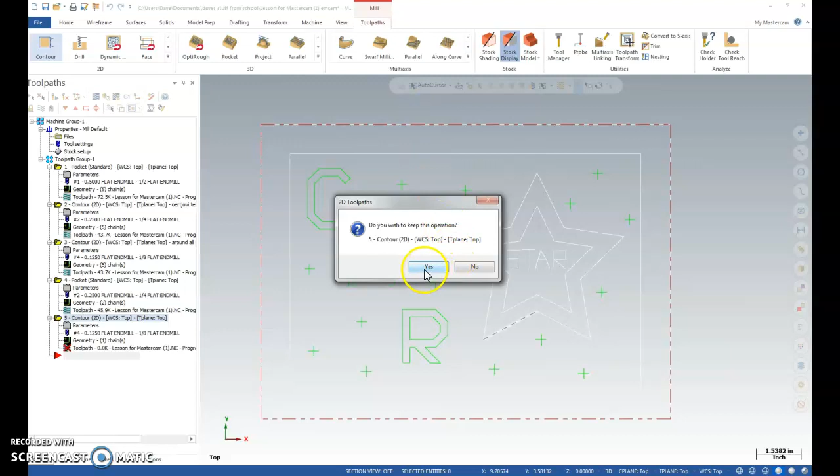Okay, it's just lagging, I guess. So I'm going to go back and close that. Let's keep this operation. Okay, try it one more time. I don't know what happened there, it's just kind of lagging. So I will try that again.

So again, I'm going to go to contour. I'm on chain, I'm going to select it. Apparently it's there. Good. And then I'm going to go to tool.

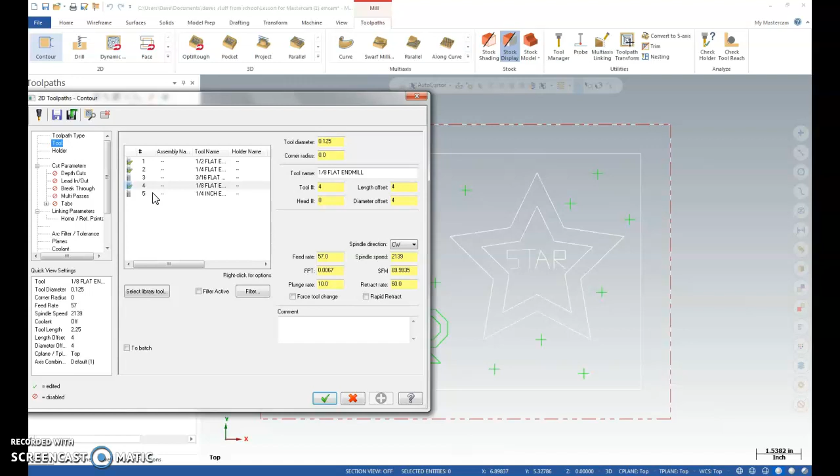Now I'm actually going to delete this to show you where I got it from, because it's here right now since I already loaded it. So I'm just going to get rid of it. I think I can just delete it.

Yep, okay. So I'm going to grab the right tool, which is the 1/4 inch tool. There it is. I'm going to change the speed to 59.

And then 10 and 60. I'm going to write a little note in here.

I'm going to go down here to cut parameters, and this is where I'm going to turn the compensation off, because we're actually trying to run the tool down the middle, which is kind of like engraving, but with a milling tool. And the depth, I'm going to check.

It should be down 0.125, so it's the same level as this pocket I just did. So select, and I am ready to go.

So that's good stuff. I'm going to fix this one because I know that I did not have the right speed for the tool. Haha, you thought I didn't catch that, but I did.

So of course that's the 1/4 inch tool, so I should have used 59 and 10 and 60, blah blah blah blah blah. Again, pretty good idea to have it, but I'm not wasting my time on it for a lesson. So checkbox, and I'm going to select all and regenerate the path, and then select all and verify.

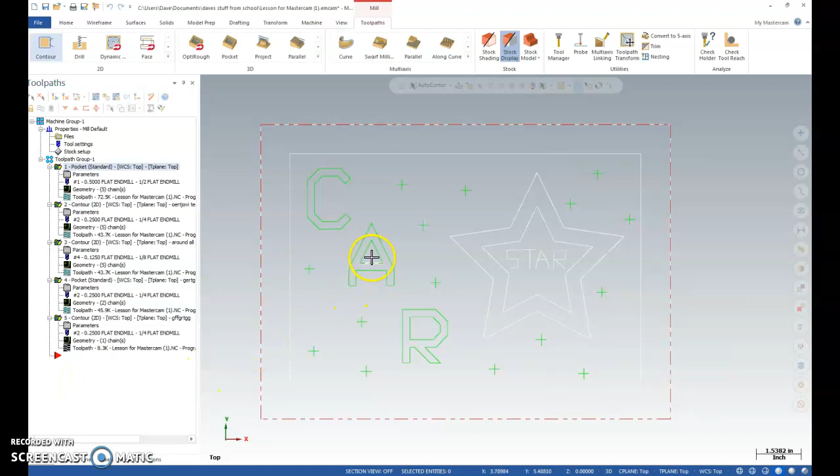So I'm just going to go to pocket, which is here. Make sure chain's on, and then touch this guy. Remember, I don't care about the direction of the arrows for a pocket. So I have these two pockets.

They're small, I'm going to use the 3/16 tool. So checkbox, and the tool is 3/16.

And remember, 3/16 is the smallest tool you're allowed to pocket with. And then you never use it to clean up, so you never contour with this tool, just pocket. And then we will clean up the inside of those two areas with the 1/8 inch tool.

So, all right, so here we have a feed rate. So again, this is 60, 59, 58. So 58. And again, I emphasize that these speeds are because later we want to be able to quickly change them to the correct speeds for wood. So they have to be different so that we can select them all and change them all at one time.

I believe everything's already set here anyway, so we've already used it a bunch of times. I'm just going to put in the depth. In this case, this is down 1/4 inch. All right, there I go, checkbox.

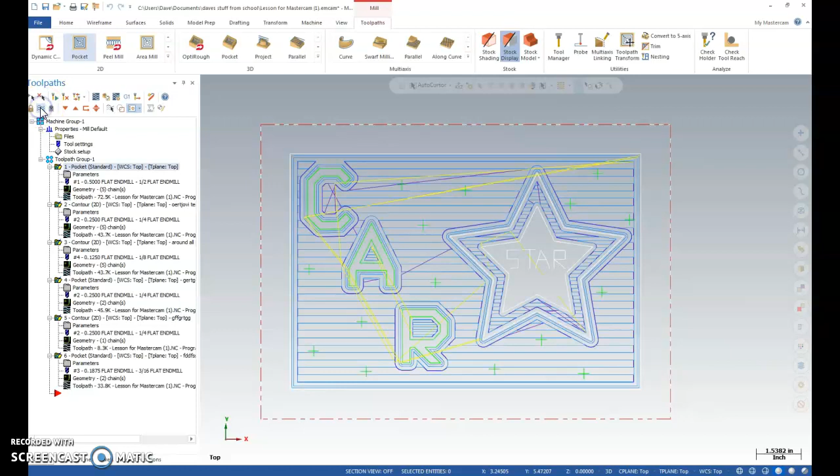All right, good. I've got the inside of the R, but you can see there are some little corners in here that are rounded. So I'm going to get rid of those, make them smaller, but I'm going to get rid of them by contouring with the 1/8 inch tool. I don't like these lines. Remember, we can get rid of those, right? This will put them all on, and this will turn them all off. Those are just the tool path lines, the center of the tool going all over the place.

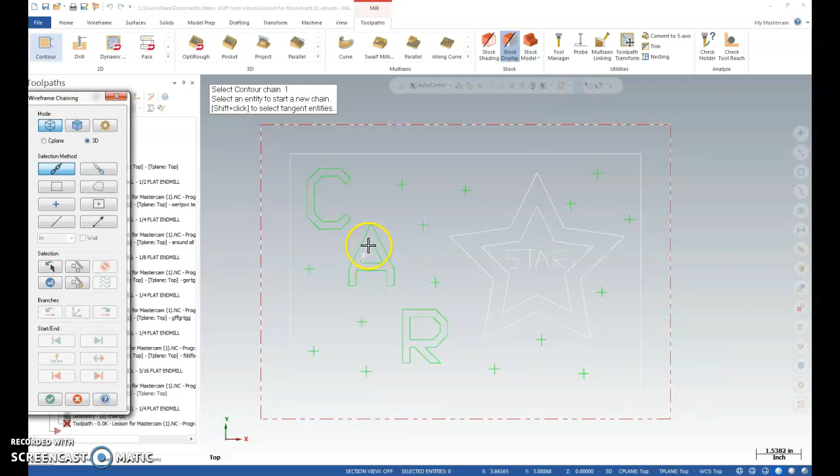So I'm going to do a new one, which is contouring, because I'm cleaning up the inside of the letters. On chain again, this time I have to think about it. I want to go on the inside of this A. So I'm going to do a contour, and make sure it's counterclockwise. I'm going to select, there's the center of the line, this end, counterclockwise, and again, center of the line, this end, counterclockwise. So I know the tool is going on the inside here, and it's going to be the 1/8 inch tool to clean it up.

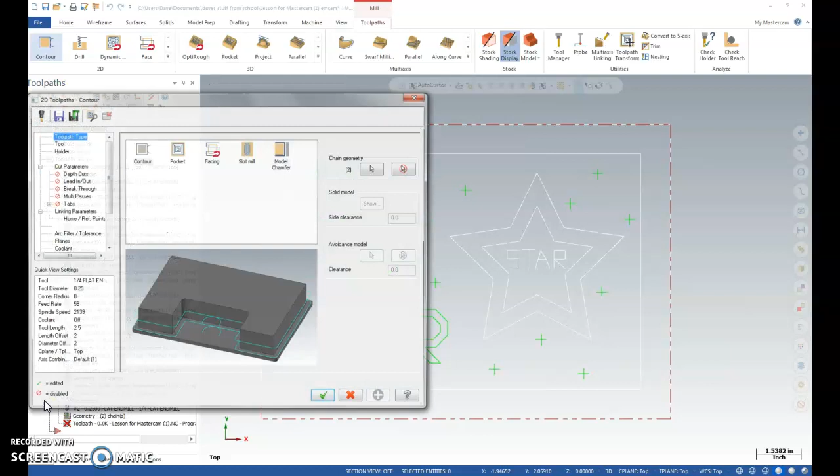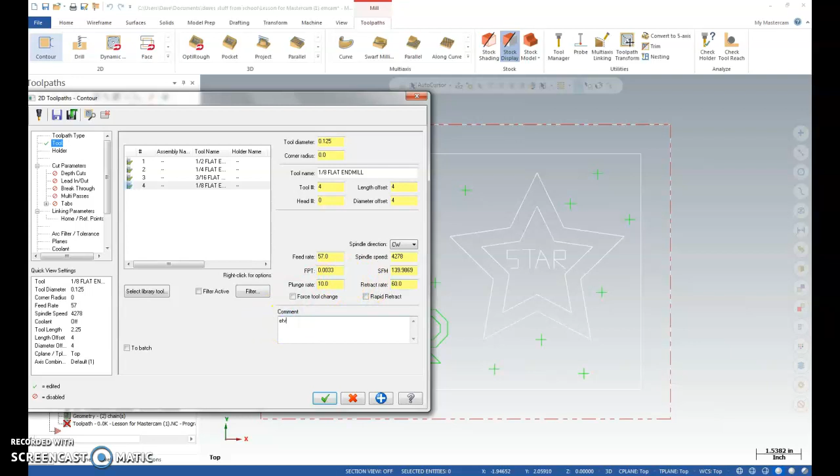Checkbox. Tool is 1/8 inch. Again, I'm going to remember 60, 59, 58, 57 is the speed. So 57, and then 10, and 60. And that looks pretty darn good.

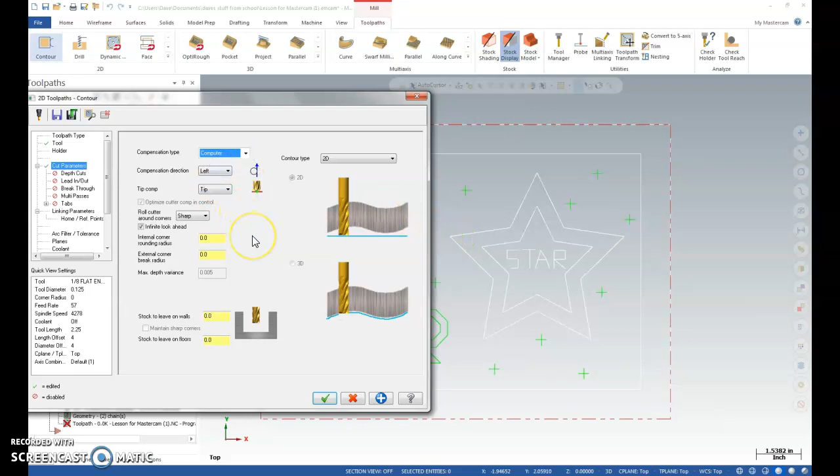So I'm going to go to cut parameters. Now remember, I just turned it off to do that outline around here to clean up the corners, so I need to turn the computer back on, otherwise it won't be in the right spot. Everything else is good, just need to go to linking parameters to put the depth in, and that's the inside of the letters, so that's minus 0.25.

So good stuff, checkbox. Remember, all this information you'd be getting from your sketches, right? Because you would already have all of this written down after you figured out what all your layers are going to be at and where you're going to mill them to the depth you're going to mill them.

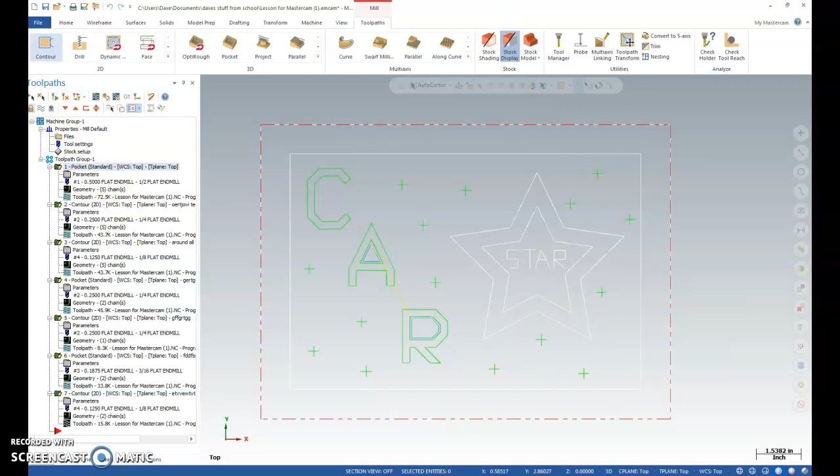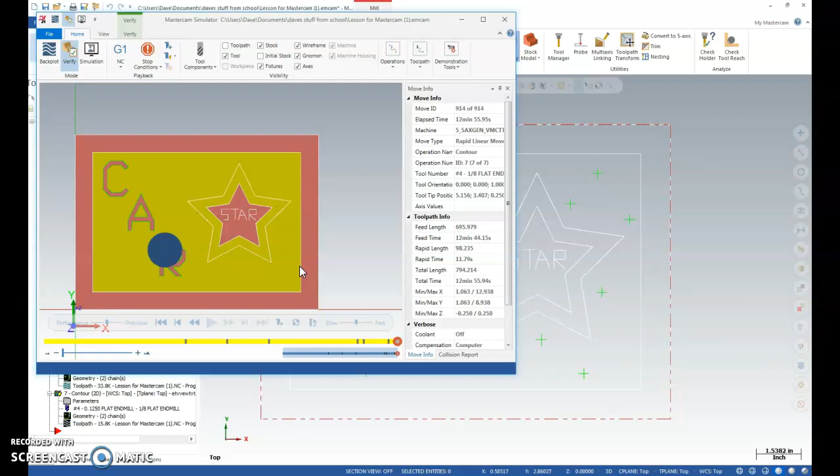Okay, let's check and see if we cleaned that up. Select all, regen the path, then select all and verify. And again, just going to play it. You can see that I've cleaned up the corners, as much as I can with the tool that I have, which is again why you don't want too much fine detail, because you can't make things perfect, since these tools all have diameters. So, all right, closing that down.

All right, now I'm going to zoom in here, and I'm going to engrave. So this engraving's on the surface of this layer, so I'm going to go down minus 0.03, and that's because this part of the star is the surface of the plaque. You want to go down 0.03 in depth to whatever layer you're going to be engraving at.

For instance, if I was engraving on this layer right here, which is down at minus 0.125, I would engrave at minus 0.155 in order to engrave that. And I would have to be careful, because I wouldn't want to get too close to this line here with the engraving, because if I get too close to this line, I'm going to gouge this out. I'll put a big gouge right here in the side of the star with the engraving tool.

If you're going to engrave in areas that are below other areas up to that edge, you need to make sure you trim your line off at least the distance equal to the difference between the two heights. So if I was going to engrave in this area right here, I'd have to stay 0.125 inches away from this edge with my engraving line. Down here it doesn't matter, I can go right to the edge because this area is below that area. I hope that makes some sense, it's kind of important for engraving.

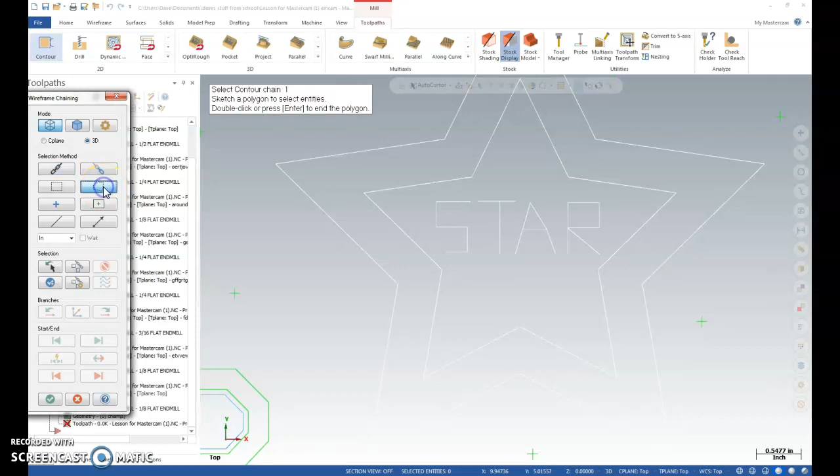So there's my engraving that I want to do. I need to first do a contour, so contouring, and this time I'm not picking a chain, I'm going to put a box around what I want to engrave. Click, and then I just surround what I want to engrave, making sure only what I want to engrave is in the box, clicking as I move around. Then it says enter to end the polygon, so I'm just going to hit enter.

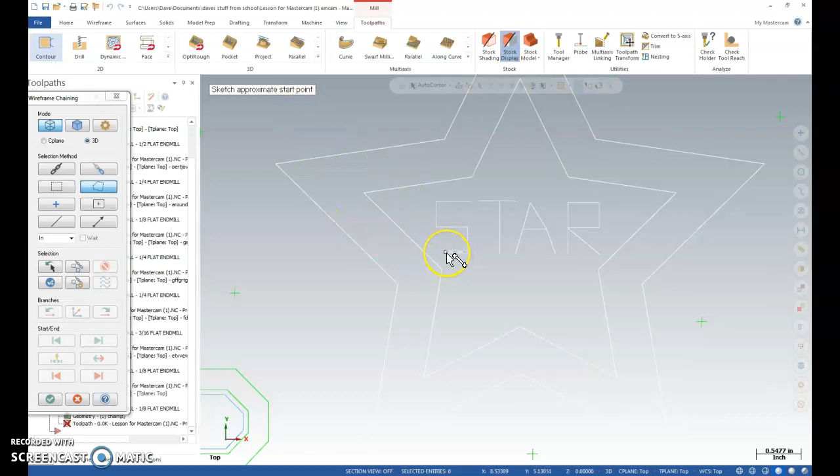Then it's asking me where I want to start the engraving, so I have to pick a spot to start. I'm going to pick there. So there's all the engraving. Don't worry about all the crazy arrows and colors, because engraving doesn't matter what tool direction you see, as long as they're all inside the box. So I'm going to select that.

And then for the tool, we're going to go get it because it's not in here, these are end mills, so I'm going to select tool from the library. Just waiting for it. Now it's automatically realized that I want to do some engraving, so I'm actually going to show you where it is before that. I'm going to turn the filter off, turn them all off. So they would have looked probably like this, because these are the only tools we're currently working with, right, the end mills that you got from your first list.

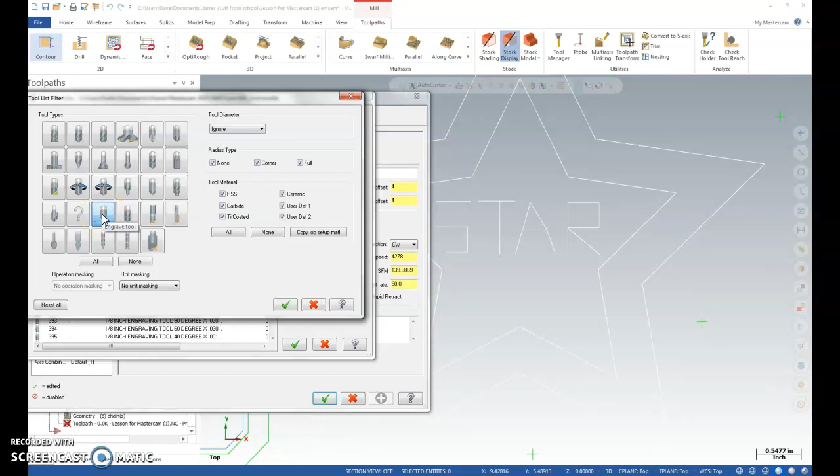So then I would just turn that off, the end mills, and then come down to the engraving tool, which I believe is right here. I select that and checkbox it, and these are all of the engraving tools. You're going to use engraving tool 425, which is right here, and checkbox it.

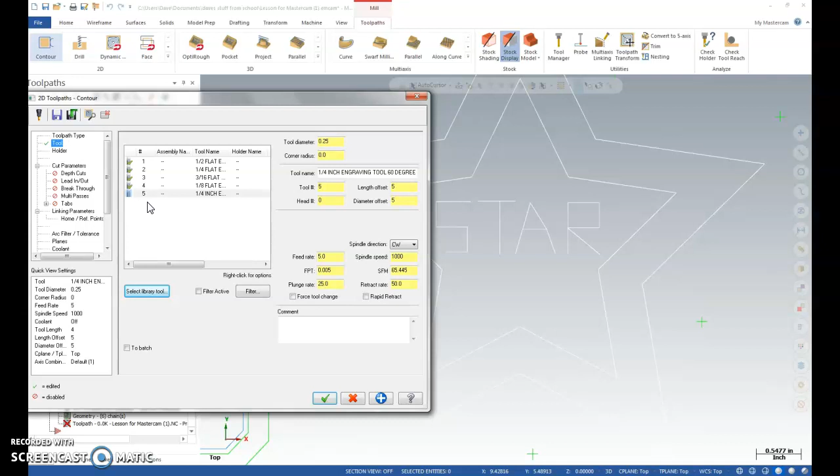So there's our engraving tool, it is tool number 5, the 5th one we put in. Now we just need to put in our depth - oh sorry, cut parameters first, because I want to turn the compensation off so it goes right down the center of these lines. Then I'm going to come down here to linking parameters, and as I told you, I'm going to go minus 0.03 deeper than the layer I'm on. In this case this is the surface of the star, so I'm going minus 0.03 deeper than the surface of the star. I'm going to checkbox that.

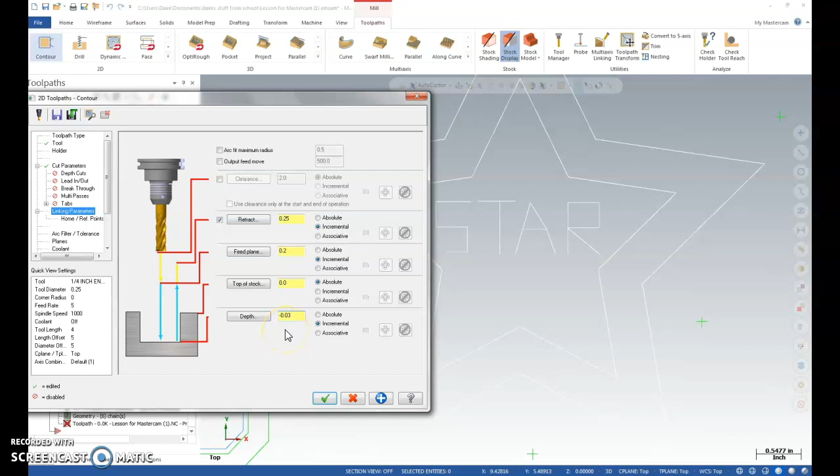Now I'm going to check and make sure - select all, regen all, select all, and verify. Play this, and the star is engraved. So there you go, you can kind of see the edge of it right here. Again I would go isometric, and you could probably go isometric at home, but my graphics card is old and it won't take it. So I'm going to close that down.

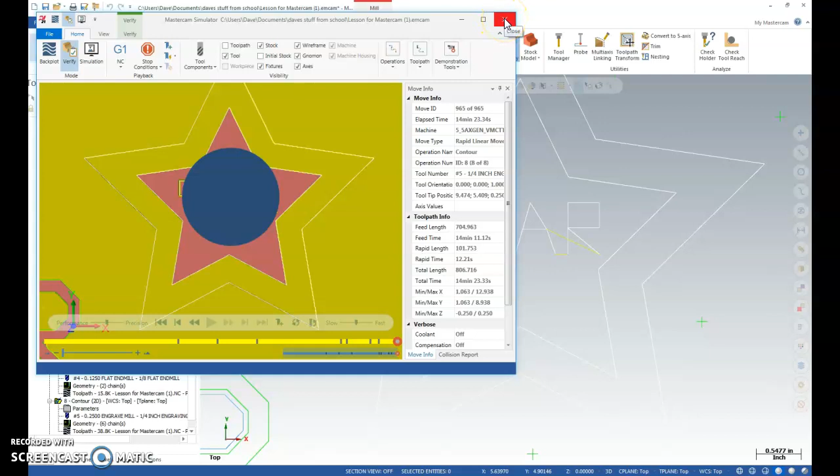And I am done, so I hope that makes sense. You can watch the third video now, and that will show you how to drill your holes, because I don't think I have enough time to actually finish that. So, all right, hope that helps.